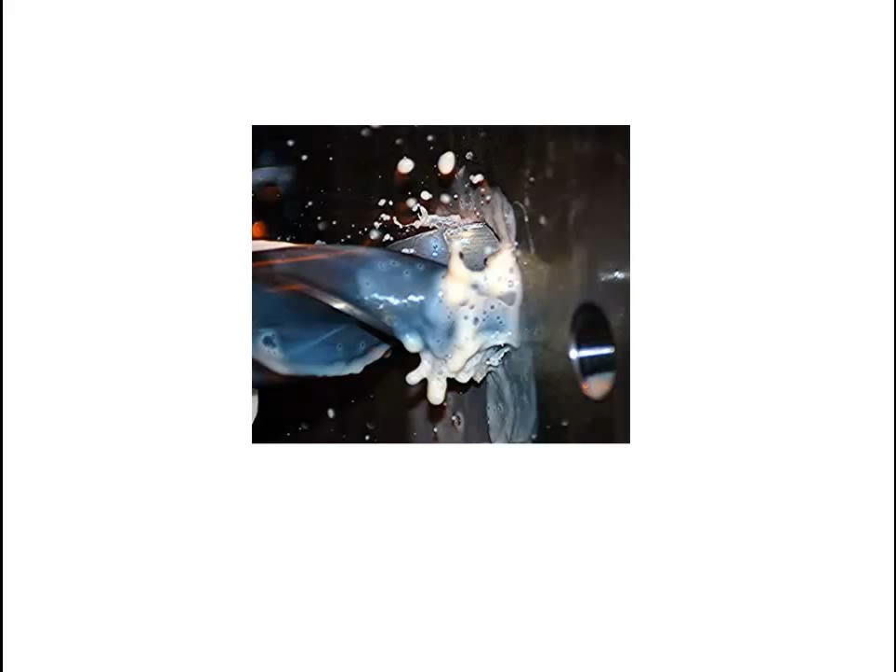If you use industrial fluids to manufacture your parts, we know two things about your process. First, we know that a certain percentage of your systems are operating within their target or optimal zone. In these systems, fluid performance and impact on the operation is positive. OEE is high, plant resources are being properly utilized, and costs are being well managed.

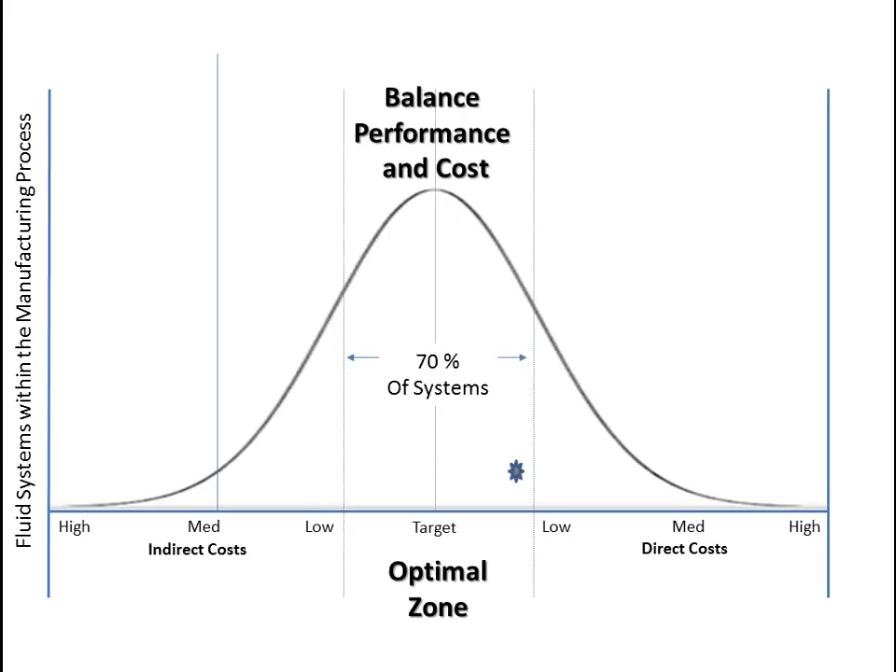The second thing we know about your process is that you have variability. Variability from system to system, as well as day-to-day variability across those same systems. It's this variability that drives your costs up unnecessarily, taxes your resources, and puts your people or process at risk.

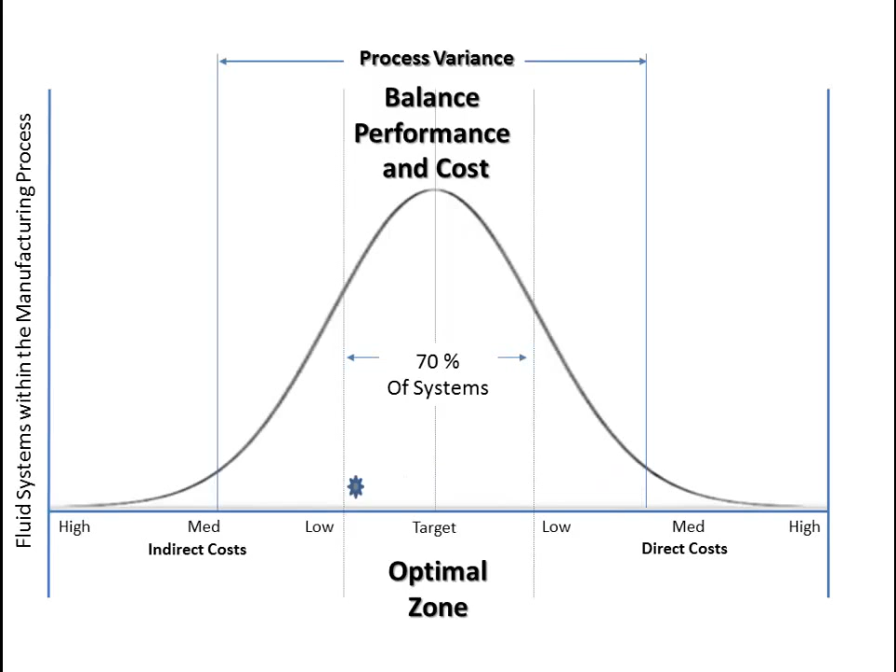This is true if you run a tightly managed world-class organization or a company that struggles to reach the productivity goals that have been set. Struggling companies also have pockets of systems that are well managed and maintained. The difference is that higher performing companies are able to manage and maintain a higher percentage of their systems within their optimal zone.

Now, we're not saying that world-class companies don't suffer from variability. The difference is these same organizations are able to maintain a tighter and taller profile related to system performance over time. So what separates high-performing companies from lesser ones is the degree of variability in the factors that drive process performance and cost. It's hard to overstate the impact of even a modest increase in the average percentage of systems that are being managed and maintained within their target zone over time.

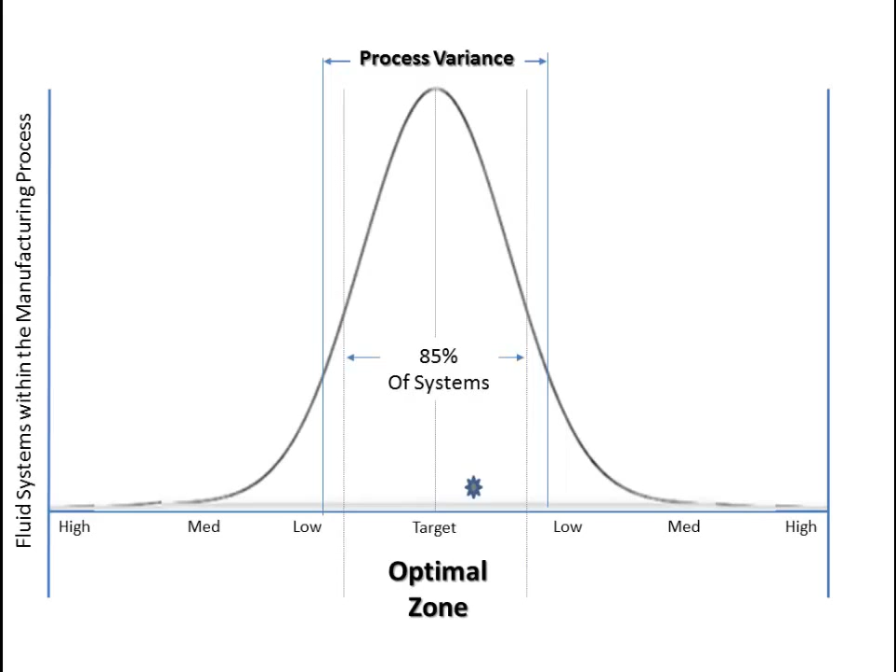Fluid condition can only exist in one of three states. It's either performing its designed function, it's putting the process or people at risk due to its condition or contamination levels, or it's being used in a wasteful manner. More fluid, more waste, more resources are being used than necessary. The volatile nature of fluids combined with the stresses of manufacturing keeps fluid condition moving between these three states at all times, unless timely and appropriate corrective actions are being taken to maintain them within the target zone.

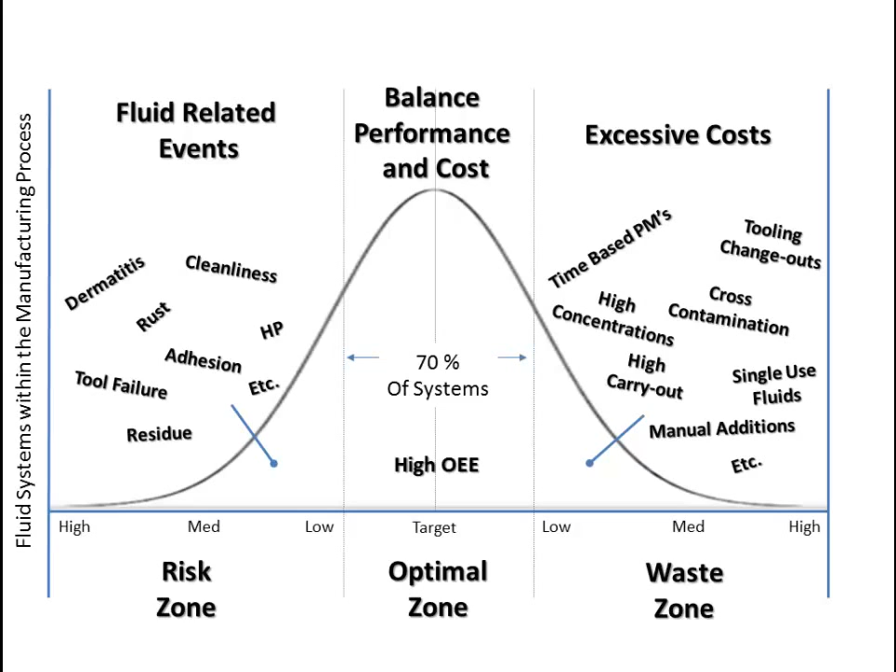Knowing what to measure, how often, and cost-effectively correcting for that condition is essential to establishing robust controls and reduced variability. Unfortunately, root cause analysis to determine all the process variables that need to be managed requires good data, combined with specialized expertise. Historically, many facilities haven't had the data or in-house expertise to determine root cause, and therefore many of today's preventative maintenance programs are based on containment steps taken to react to a manufacturing event.

Let me try and illustrate. Let's say on a hot and humid day, a wash process was not able to produce a part with sufficient rust protection to meet a customer specification. A rust event occurred, and in an effort to quickly address the problem, the decision was made to dump and recharge the system. Now the problem went away, and the cost of poor quality significantly outweighed the cost of dumping and recharging the process. So another decision is made. The washer is put on a 90-day PM schedule moving forward to avoid it from happening again.

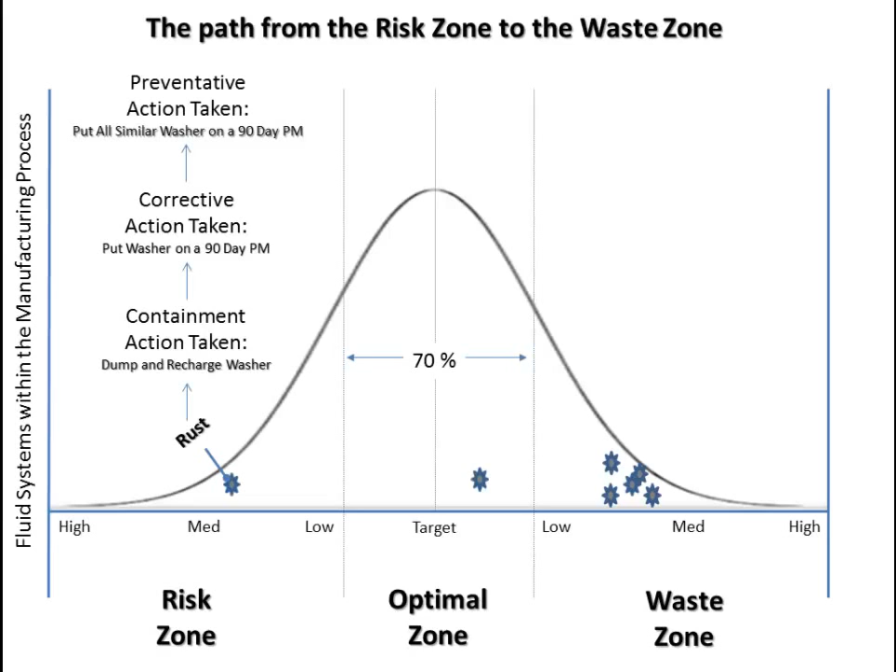Now, why is this wasteful? Well, because the rust event had nothing really to do with the fact that the fluid was more than 90 days old. Let's take it one step further. There are 8 other similar washers in this facility, so again, in an effort to avoid a quality event, all 8 washers are added to the PM program. The incidence of rust goes down, but the preventative measure drives costs up, taxes resources, while the risk of reoccurrence still exists because the root cause was not determined and managed directly.

By not determining the true root cause, risk of reoccurrence remains, while wasteful steps are added unnecessarily to the manufacturing process. These steps stack up, one on top of the other over time. Fluid condition variability, where true root cause is not understood, inevitably leads to wasteful plant practices. How your fluids are being managed and maintained can significantly impact how quickly you can reach the goals you have set for the coming year. More than the cost of fluids, their day-to-day impact on the operation has a cascading effect across all departments.